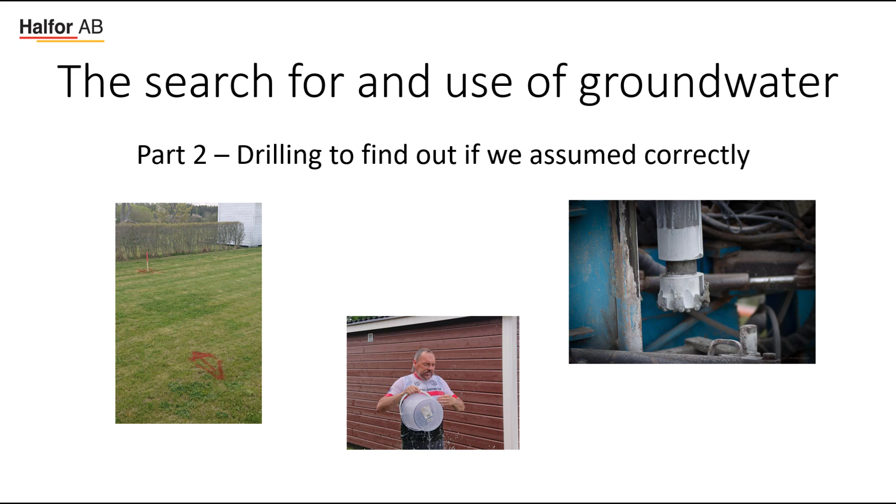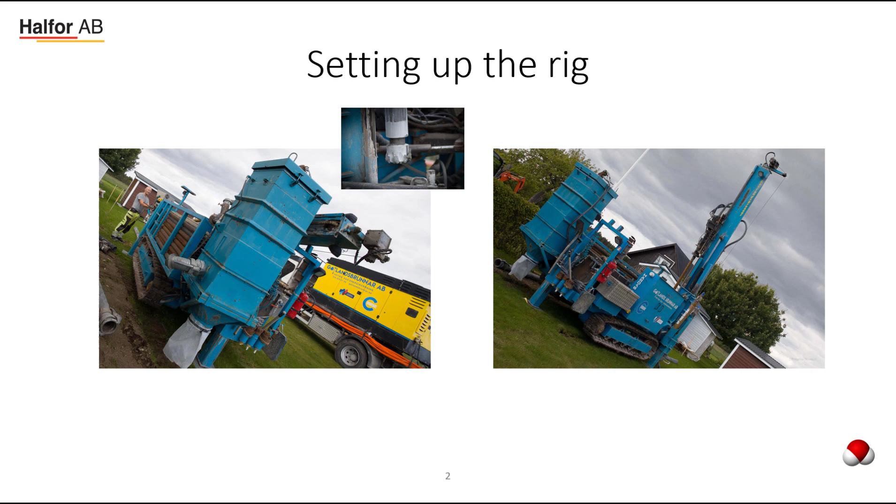On the right hand side you see the raised bore unit in the drilling rig ready to start drilling down in the ground. On the picture to the left you see the connection point to the drilling bit and also the protection piping that are being put down in the ground to protect the groundwater well from leakage from above, to basically protect it from contamination.

Now, as I said in the first video, you never know with groundwater, and it all depends on the ground conditions if you're gonna find something.

When we started drilling, we went first through 3 meters of sand, which in itself could be a potential infiltration for groundwater, but not in the area I was looking in, of course.

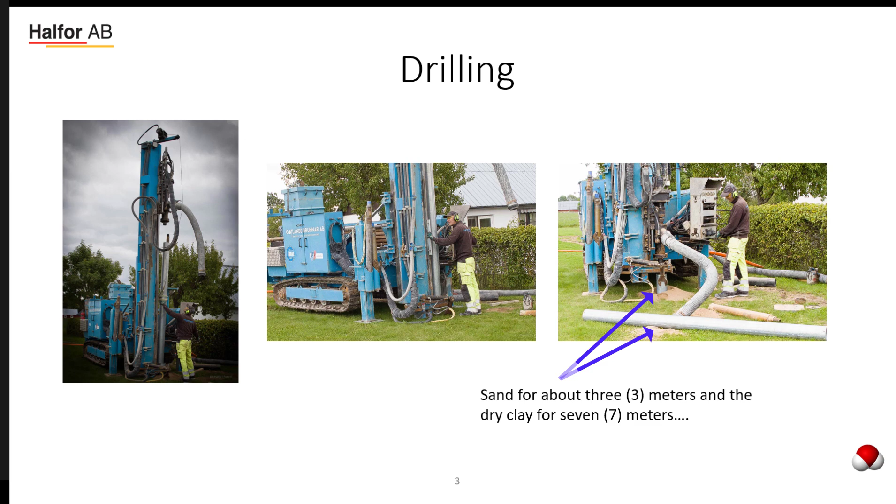And after those 3 meters, we went through clay, very dry clay, for about 7 meters. On the right hand side picture, you see the sand and clay residues from the drilling of the well. So this was the first 10 meters of the hole for the groundwater well.

We are now, when this was done, this picture was taken, you can see the sand and clay residues. We were down about 10 meters in the ground.

Then we discussed on how far to go, since we have not seen any indication of water. So we decided to go down to 17 meters and stay away from the saline areas that are well known in this area.

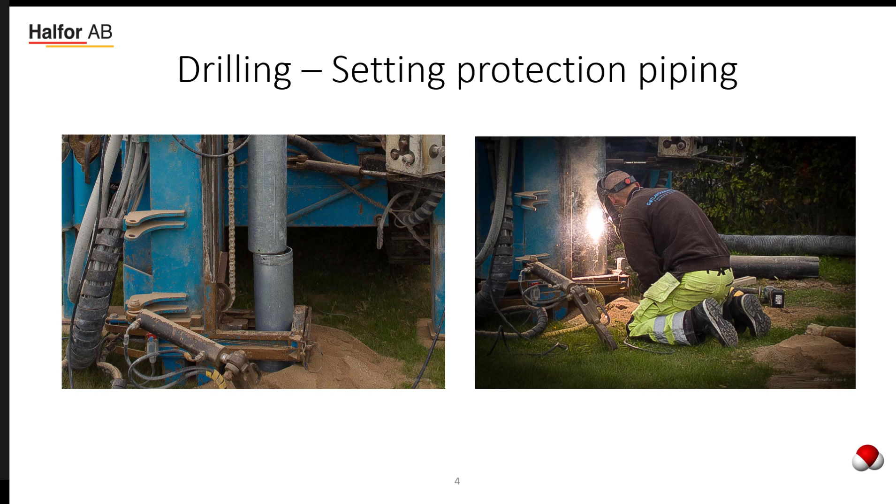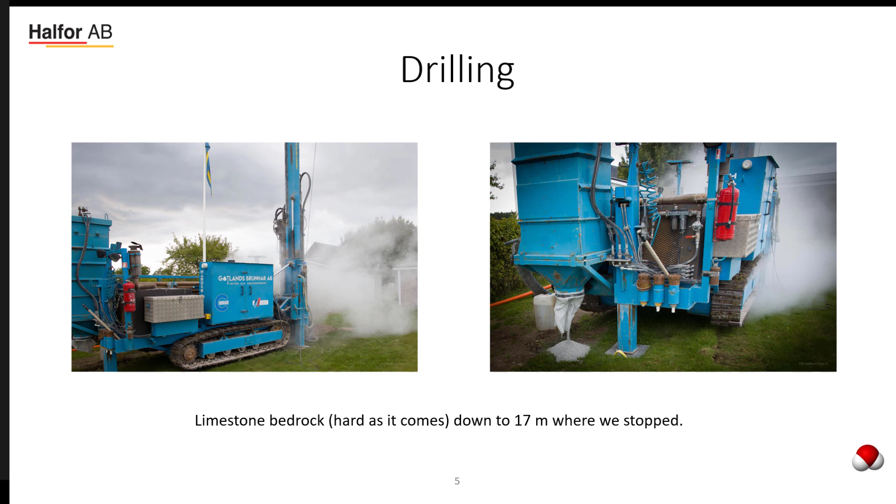But very obviously now we're down in the limestone bedrock, and we went down to 17 meters where we stopped.

So here you can see the drilling protocol and basically a summary of what we've done. First, from level 0 to 3 meters, it was sand and gravel. 3 to 7 meters, clay, dry clay. And then 7 through 17 meters, it was limestone, very hard limestone.

After doing this, I was really hoping to see some wetness in the drilling hole, but it was dry. However, when you do this type of drilling, as you've seen here, you force your way through the sand, the clay, the limestone, which also means that you can also seal with very fine particles if water is trying to get in.

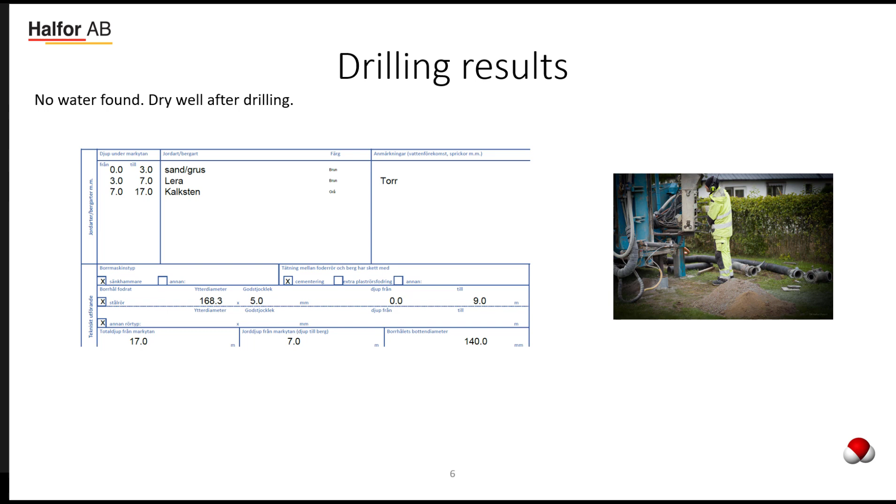So based on this, we discussed on how to do it further, and we decided to take a measure called pressurizing the well. So for part 3, I will be telling you and showing you how pressurizing of a well is done based on my own experience.